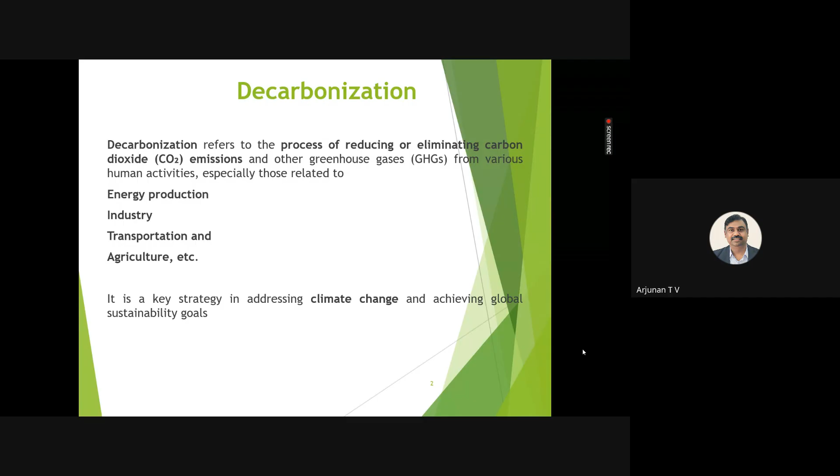decarbonization. It is the key factor in addressing climate change and achieving global sustainability goals, so this word is very important at present. Industry decarbonization has the same definition: it refers to the process of reducing or eliminating carbon dioxide and other greenhouse gases from industrial activities without compromising productivity or economic growth. This is the definition of industry decarbonization.

Normally this involves transitioning industry toward cleaner energy sources, efficient technologies, and sustainable production processes to achieve low carbon and net zero emissions. That is the aim. Particularly, a few industries are the largest contributors of CO2 emissions: steel, cement, chemicals, oil and gas, aluminum, fertilizers, and manufacturing. Industry decarbonization aims to make these sectors environmentally sustainable while maintaining competitiveness.

So is industry decarbonization important? Yes, because the industry sector is a vital source of wealth, prosperity, and social value in the global system. Without industry, we can't survive. Industry produces about 1/4 of global GDP and employment, along with roughly 1/4 of the world's GHG emissions. CO2 is the most significant gas emitted from industrial activities, and almost half of it comes from the production of four commodities: cement, steel, ammonia, and ethylene.

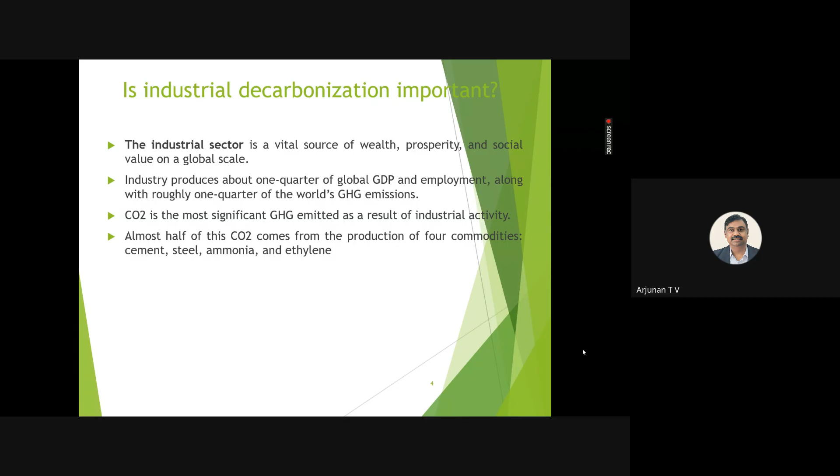So there is one agreement done by the United Nations countries. It was done in Paris in the year 2015. The agreement mainly focuses on keeping the temperature rise below 2 degrees centigrade and ideally limiting the average temperature rise to 1.5 degrees. So this agreement mainly states preventing the average global temperature rise to 2 degrees, and we have to reduce it to 1.5 degrees Celsius.

So all the countries associated as United Nations members have agreed to limit this temperature rise within 1.5 degrees. Achieving these goals would require an 80 to 95% reduction of global emissions by 2050.

Before the industrial era started, in the 1880s, the average temperature rise was very minimal. But after the industrial era started, the average temperature rise has been increasing year by year. Now we are almost reaching 1.5 degrees, and because of this it is threatening the globe.

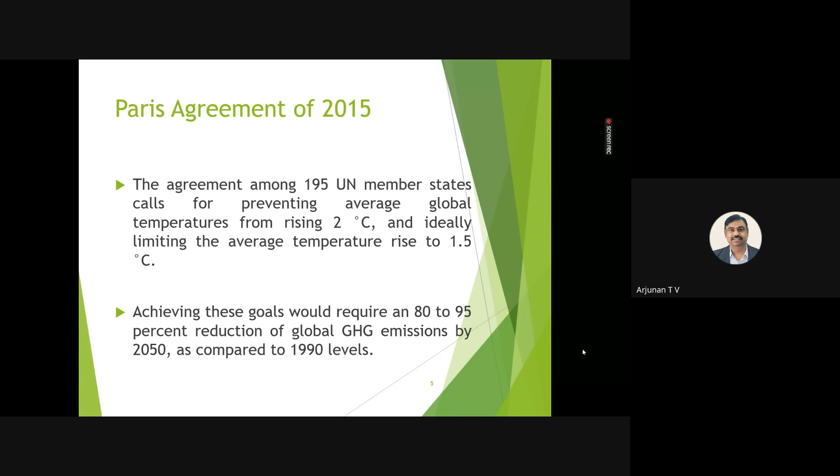So how to achieve industrial decarbonization? There are different ways. First is the transition to renewable energy: we have to replace fossil fuel with clean and renewable energy sources. A number of renewable energy sources are being promoted nowadays. Out of these, solar is the major contributor compared to other renewable energies such as wind, hydro, biomass, and geothermal.

Apart from that, we have to improve energy efficiency and electrification of industrial processes. Wherever we are directly using fossil fuel, we have to convert that into electrification, and adoption of green hydrogen, another important topic people are talking about more nowadays. And carbon capture, utilization and storage is also another important topic. These are the solutions for achieving industrial decarbonization.

So today we are going to discuss only solar. That is the topic given to me. Solar, particularly solar thermal, so we are going to talk about solar thermal only.

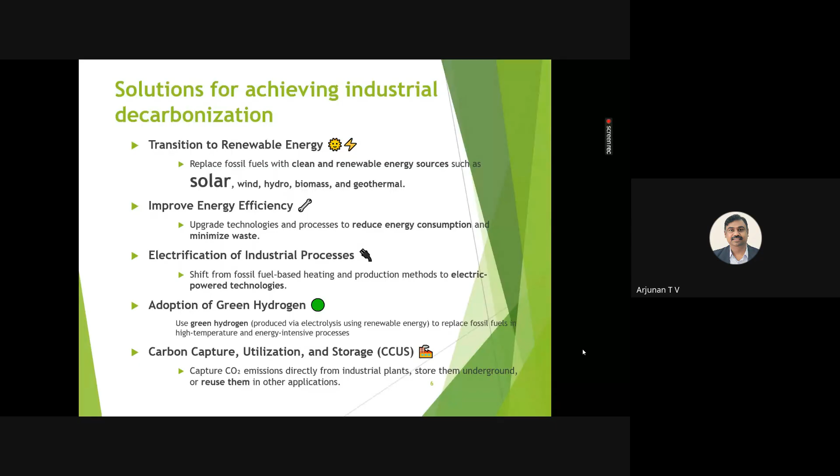Now we are coming to solar energy conversion. Solar energy is converted into two forms of energy: one is electrical energy, another is thermal energy. Everybody knows electrical energy. With the help of a photovoltaic cell, we can directly convert radiation energy into electrical energy and send that energy to the users. Then another kind of energy is called thermal energy.

In thermal energy, the radiation energy is converted. Sorry for that. So this is solar thermal energy. This is the collector, converting radiation energy into thermal energy. This is a sample collector for solar thermal application.

The solar radiation falls on the surface here. This is called an absorber. What will the absorber do? It absorbs the radiation and converts it into heat, so this heat energy is available here. Then some fluid, water or air, passes through this absorber plate to extract the heat, and the heated fluid we can utilize for the purpose. This is the simple basic principle of solar thermal.

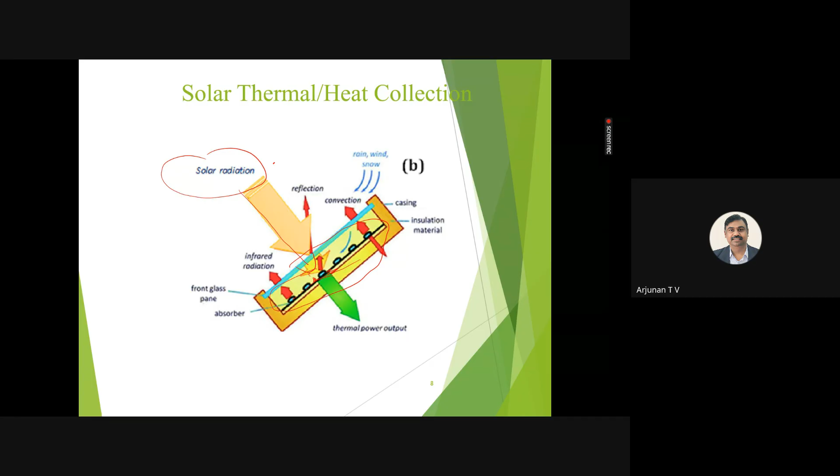So there is a classification of thermal collectors. We have basically non-concentrating and concentrating types. Under the non-concentrating type, you can see flat plate collectors, evacuated tube collectors, and PVT collectors. And under the concentrating type, you find parabolic trough collectors, heliostat field collectors, linear Fresnel collectors, parabolic dish collectors, and concentric parabolic collectors.

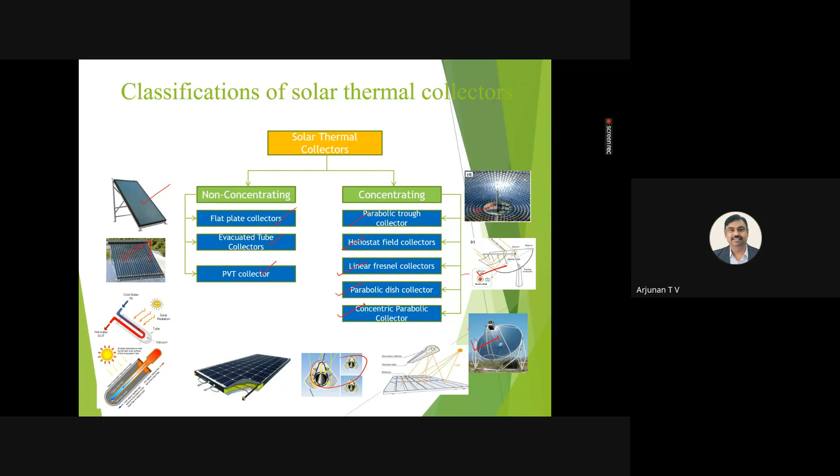So this is the flat plate collector, this is the evacuated tube collector, and you can find this is a tower concept. This is the parabolic trough collector. This is the concentric parabolic collector, and these are the different collectors. This is the evacuated tube model. So we'll see them one by one quickly.

And this is the basic classification of the solar flat plate collector. The flat plate collectors are basically divided into two groups. One is the water heater, another is the air heater. In the water heater, water is the working fluid, whereas in the air heater, air is the working fluid.

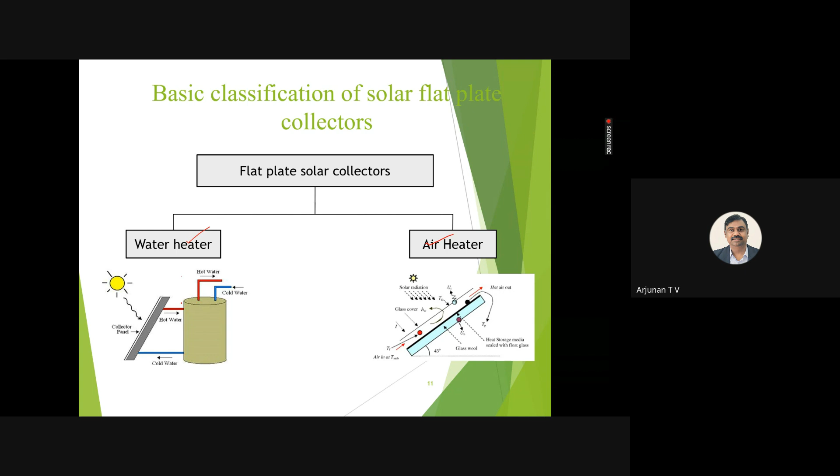So this is the basic components of the flat plate water heater. You can see there is the glass cover, and there is a copper tube where the fluid is passing through, and the bottom surface is the absorber plate, and there is the insulation. The purpose of the insulation is to reduce the heat loss from the system to the surroundings, and the aluminum casing covers the entire system. These are the five important components in the flat plate solar water heater.

So now, see here, when the radiation strikes the flat plate collector, this is a transparent glass. After passing through it, the radiation directly contacts the surface. There, the radiation energy is converted into thermal energy. That energy is transferred to the copper tube where the water is flowing inside. As it travels, the water gets heated and is collected outside. This is the working principle of the flat plate collector.

So here you can see there are two types of solar water heating systems. One is the thermosiphon system, another is the active system. In most houses, you can see this kind of thermosiphon system. Here, the water comes from the main tank to the solar tank, going into the system through the inlet pipe. Initially it is filled with cold water.

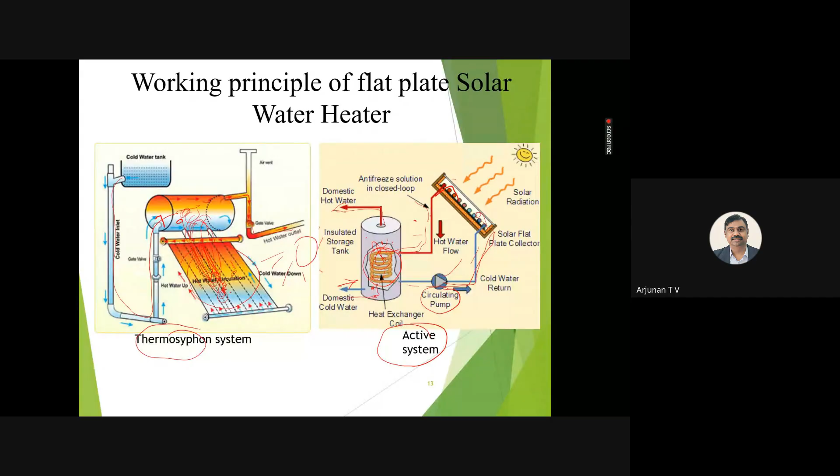Another collector is called the evacuated tube collector. Evacuated tube collectors have the maximum efficiency among concentrating technologies because they require less space. There is a lot of advantage over the flat plate collector, and it can be used in cloudy conditions and cold, windy days. This is the biggest advantage compared to flat plate collectors.

It is a kind of cylindrical tube, as you can see, with an absorber coating. There are inner and outer tubes, and in between there is a vacuum space. The purpose of the vacuum space is to reduce the heat loss between the inner surface and the surroundings, so it acts as an insulator.

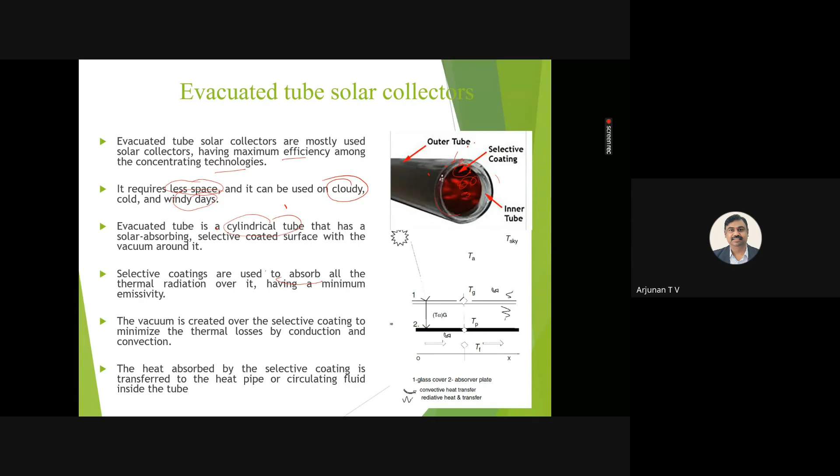There is also a selective coating to absorb all the thermal radiation. This is the inside, where you can find the selective coating, to absorb the maximum radiation available at the site. Once it is heated, this heat is transferred through the working fluid. It may be sent directly to the surface, or with the help of a heat pipe or another medium, we can extract heat from the surfaces.

So you can see this is a view of the ETC tube. This is the view of the ETC tube. Normally it is available in two diameters: one is 58 mm, the other 47 mm. The length of the tube available is 1500 mm and 1800 mm. These are the materials of the tubes.

This gap here is the vacuum. This is called the selective coating surface, and we are getting almost 90.7% of the sunlight onto the surfaces. This is the biggest advantage.

The working principle of the evacuated tube is also very similar to the flat plate collector, but slightly different. You see, this is a water tank, and this is the evacuated tube attached to it. If you have solar water heating in your home, you might have seen this arrangement. This solar tank is connected with the evacuated tube.

So what happens? Once it starts, water is flowing inside the evacuated tube. When the sun rays hit this surface, the surface gets heated because of the selective coating. This radiation is converted into heat, and that heat is transferred to the water, causing it to get heated. Then, by the same principle, since this is hot water and this is cold water initially, this happens due to the density difference.

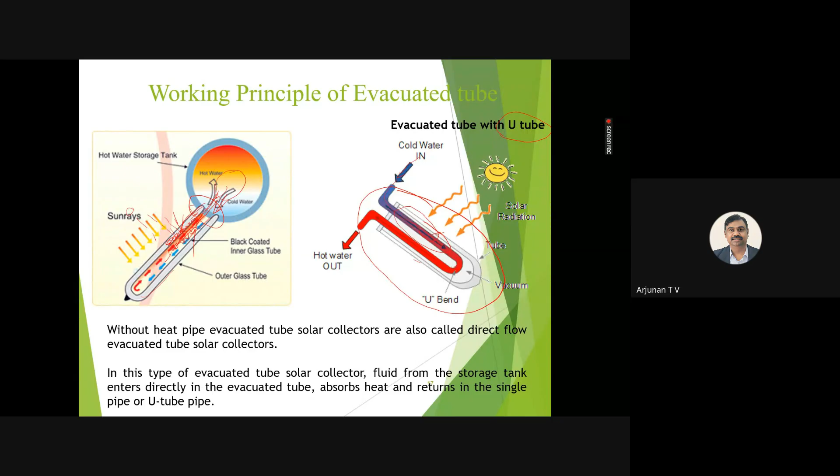So why did this concept come about? In the previous case, all the tubes are connected together. Suppose, due to natural causes, one tube breaks, then the water will leak out. This is a big loss every time this happens. But here, this problem does not occur, because if one tube develops an issue, we can change it easily, with no water losses and no disturbance to the process. This is the advantage over the previous system.

And the similar concept for the evacuated tube, you can see that one.

Here it's called the heat pipe arrangement. This is the ETC tube, inserted with the heat pipe, where one side is the evaporation side and the other is the condenser side. There are two sections: this is the condenser side, this is the evaporation side.

The principle of the heat pipe is there is a working fluid filled in the heat pipe. When the radiation strikes, that radiation is converted to heat. The heat energy available in this surface is transferred to the heat pipe. Once the heat is received, the fluid available in the heat pipe gets evaporated.

Once it is evaporated, it moves in the upper direction. So the evaporated vapor is available with high temperature here. Then we are circulating the water from the outside through this header, where the heated vapor is available.

When the water is contacted with this surface, it transfers the heat to this water, and because of that the water gets heated. Then we are taking the hot water outside, and once it releases the heat, this fluid gets condensed again. Then it comes back to the bottom surface, gets heated again, evaporates, and transfers the heat again. This cycle is repeated.

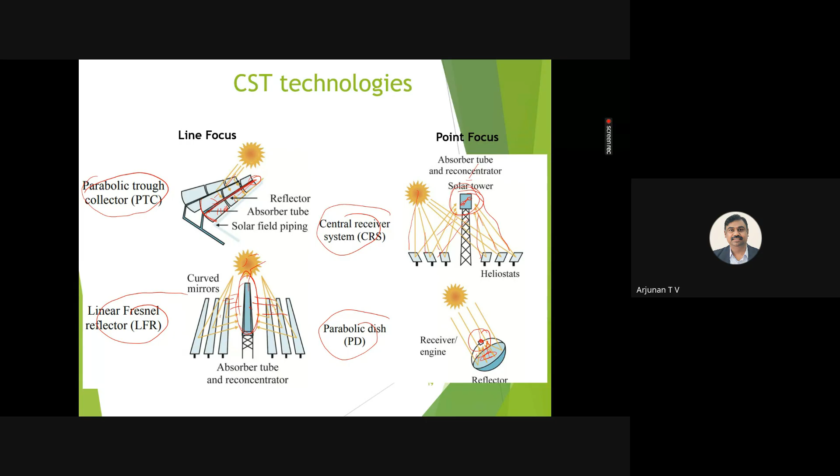So these are the different types of collectors we have seen: flat plate collector, evacuated collectors of different types, parabolic trough, linear Fresnel, parabolic dish, and central receiver collector.

Now let's move to solar industrial process heat, normally called SHIP. So what is this? It's about solar energy potential in industries.

Normally, almost 40 to 50% of total energy is consumed in the industrial sector alone. If you consider the whole, out of 100%, nearly 50% of energy is consumed by the industry sector only. That's why whenever we talk about energy crisis or global warming, mainly we focus on industry, because industry consumes more than 50% of the energy we use nowadays.

And out of that 50%, further, 54% of consumption is in thermal form. Thermal form means directly, not electrical form. So they use heat energy for different applications, with temperatures ranging below 250 degrees.

These applications include drying and finishing in the textile industry; drying, dissolving, thickening, leaching, and distillation in chemical industries; cooking, drying, and canning in the food industry; and kraft pulping, bleaching, and drying in pulp and paper industries. So many applications use heat energy directly without using electrical energy, which is why they use fossil fuels for this purpose.

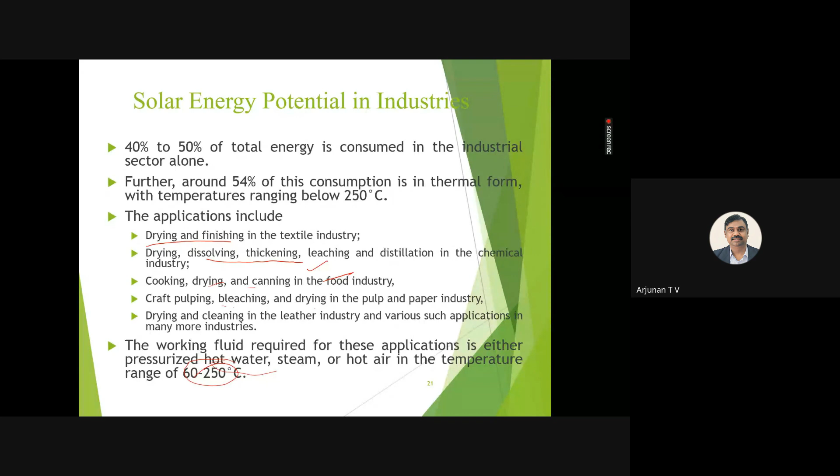The working fluid required for this application is pressurized hot water or steam in the temperature range of 60 to 250 degrees Celsius. So for less than 250 degree temperature, it is easily obtainable from solar thermal technologies.

We can further see different industrial process applications for different industries, and here you see the temperature range. For drying, 30 to 90 degrees is required. For the food and beverage industry, for washing, 60 to 90 degrees is required. You can see many such applications.

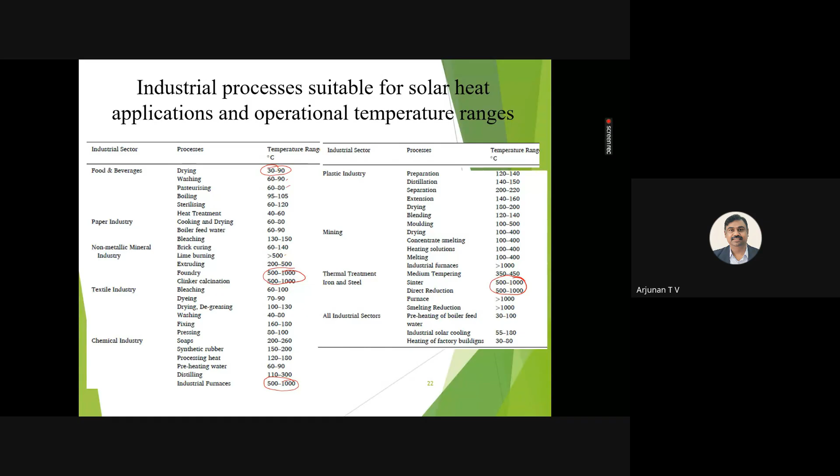Only here you can find 500 to 1000 degree requirements, which are a little difficult to get from solar thermal. But less than 250 degrees is quite possible with the collectors we have seen. So the high temperature side is a little difficult to achieve exactly, but the lower temperature side, less than 250 degrees, has great potential for implementing solar thermal applications in different industries.

This can easily be achieved with the help of flat plate and evacuated tube collectors. Normally with evacuated tube collectors we can get temperatures around 150 to 160 degrees.

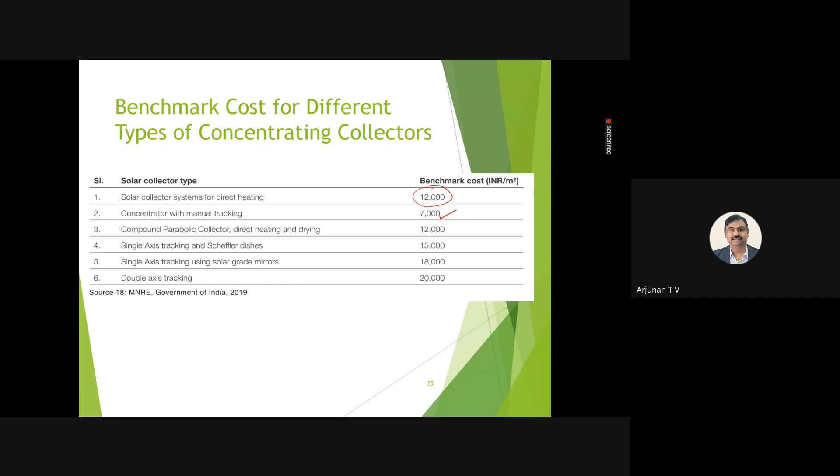And the benchmark cost for different types of concentrating solar collecting systems, you can see, is approved by MNRE. A solar collector system for direct heating application is 12,000 per meter squared. And for concentrator with manual tracking, this is the benchmark. It may vary a little from place to place.

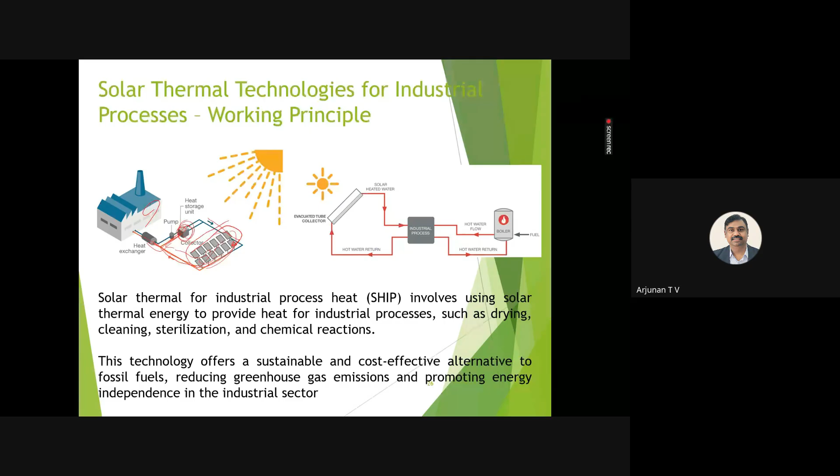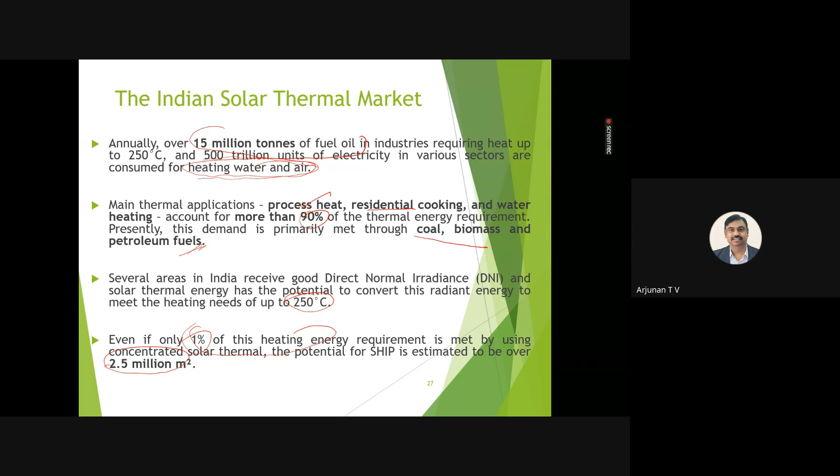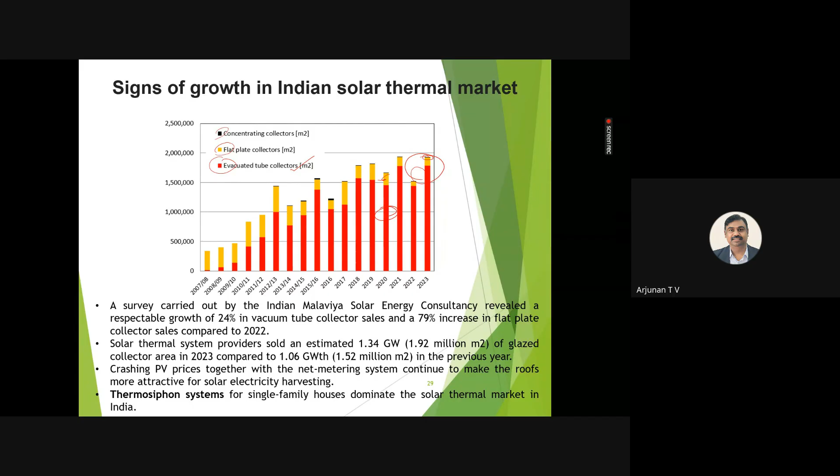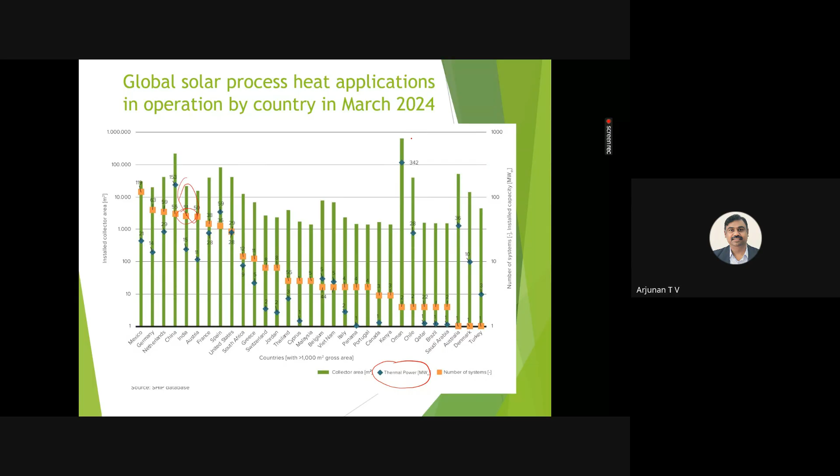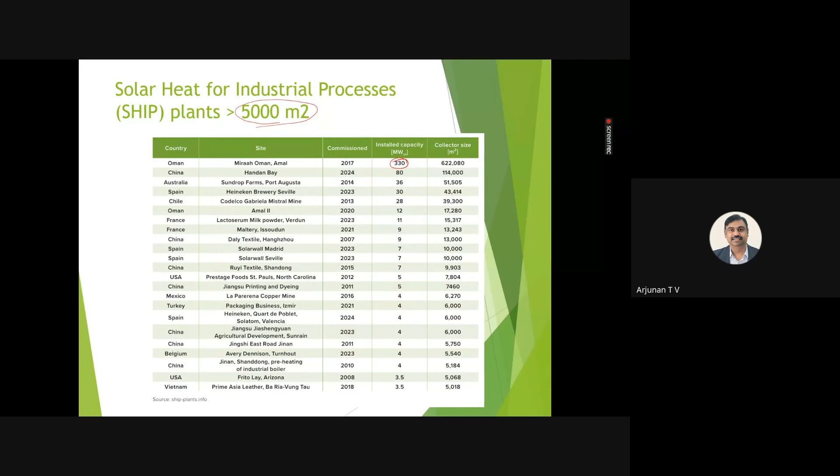And solar heat for industrial processes, plants greater than 5,000 square meters installed, you can see Oman is at the top level, because previously also you could find Oman having a very high number. That's why it's showing here. But we are not in the table because it considers only industrial processes installed with more than 5,000 square meters.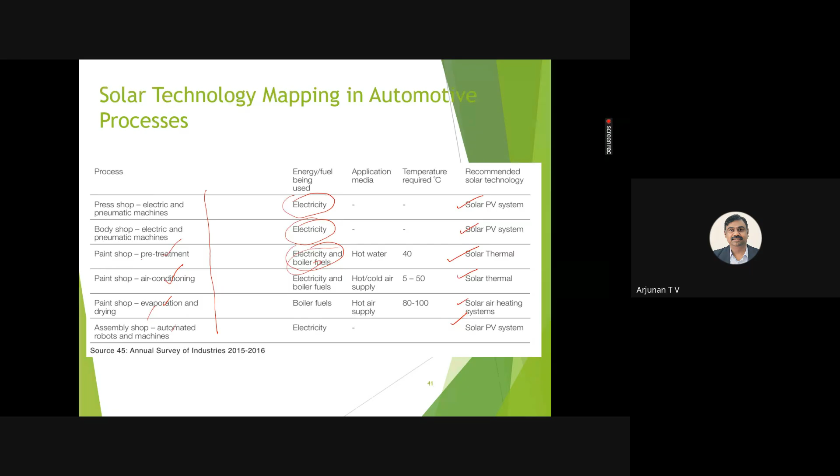electricity, boiler fuels. Wherever electricity is used, that can be replaced with the solar PV system, and wherever heat energy is required, that can be replaced with the solar thermal system. So this is a recommendation for this industry. And for CST, concentrated solar thermal, the potential is also there for dairy industries, around 60%, and food processing industries, and we have huge potential for these industries. So we can use solar thermal technologies for these applications. We can reduce the carbon.

So now we'll move to the general process of SHIP plant design. Suppose we want to design and install a solar heat for industrial process plant, there is some systematic way we have to go. First is the preliminary analysis, to identify the potential application based on basic information about any industry that wants to install. Suppose we want to replace those processes with solar thermal technologies. Then what do we have to do first? We have to go and do the preliminary analysis. We cannot directly buy a panel and install, like in photovoltaics.

Here we have to do some basic initial work before installing the system, to identify the potential application based on the end user, the particular energy consumption, the location. Location is mainly how much solar radiation is available, the heat requirements, and the current energy cost they are paying. And the detailed analysis of heat supply and the heat consuming processes, how they are consuming heat. This would include information on the site condition, available space on the ground, whether we have to install on the ground or on the rooftop. So we have to analyze all those things, and assess the general infrastructure of the industry, including water and electricity networks.

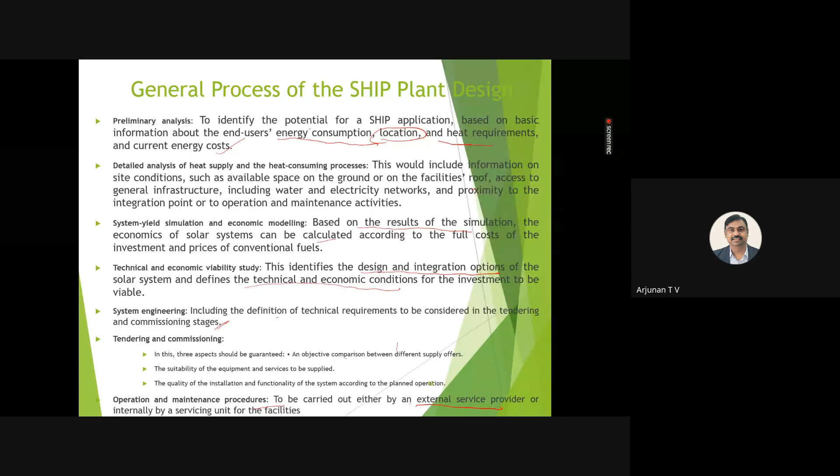And one of the important systems in solar thermal technology is the steam boiler. For industrial processes, we need the steam boiler, the most common heat supply system in industry, supplying different processes directly or indirectly through a heat exchanger with steam. And pressurized hot water for low temperature applications, particularly in the 100 to 120 degree range. Then thermal oil is another important working fluid for temperatures up to 350 degrees, because in some places we cannot use water, so there we have to go with thermal oil.

And hot air burners, then combined heat and power. Heat pumps are another important component; they can upgrade low temperature waste heat to a higher grade. So heat pump technology is also booming at present.

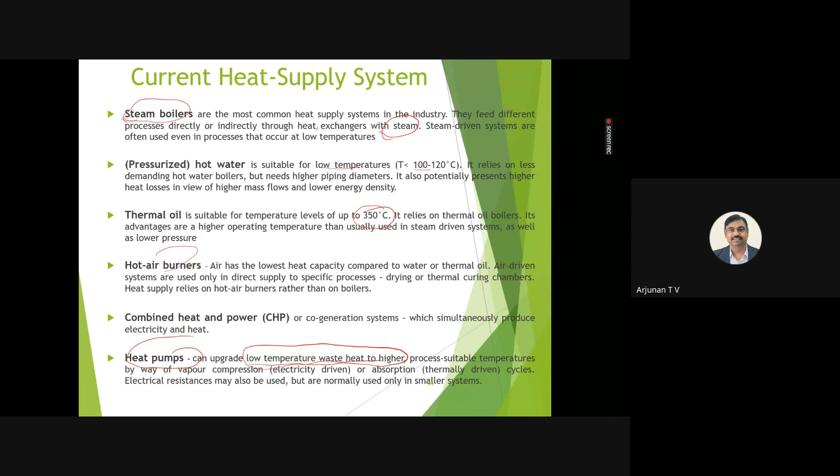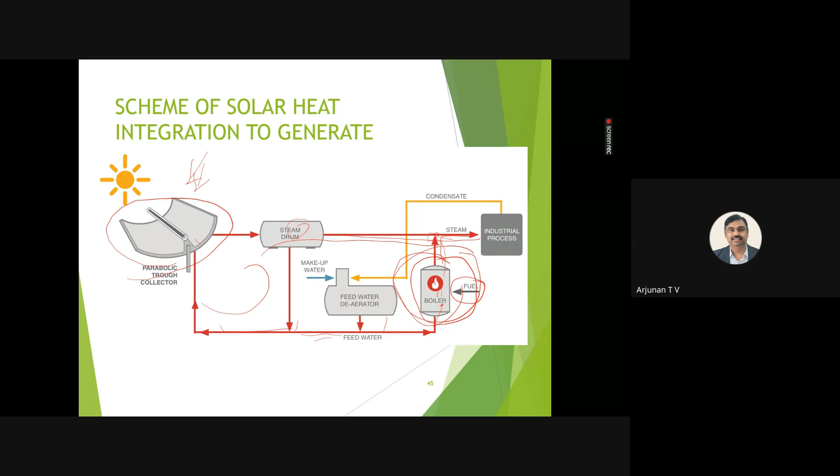When we are getting sufficient sun energy here, we can reduce the usage of fuels; all the energy and steam conversion will be done here, then it is moving here. Whenever we are getting low solar energy, then this will operate, so that our industrial process will not be hampered. This is the integration and the structure in India, how to make this structure.

Normally the beneficiary is called the heat consumer, who is going to consume it. The customer is the one who intends to set up the SHIP project. The supplier is the one who manufactures or completes the system and maintains it under the stipulated warranty. Then the EPC contractor is a registered engineering company that installs the complete system. In most cases, the supplier will be the EPC contractor.

The developer identifies the industry that can use the system. They obtain the system from the supplier and get it commissioned by the EPC contractor, also arrange the finance and prepare the detailed project report. He is called the developer. And the O&M service provider is normally the supplier or EPC contractor who maintains the system.

The dealer is the network of the supplier and developer for different parts of the country. Then the bank or financial institution provides a loan for the project after due diligence, sometimes also with equity participation. And the central or state government agency provides grant in aid, if any, as per the available policy. They will inspect whether it is done as per the norms.

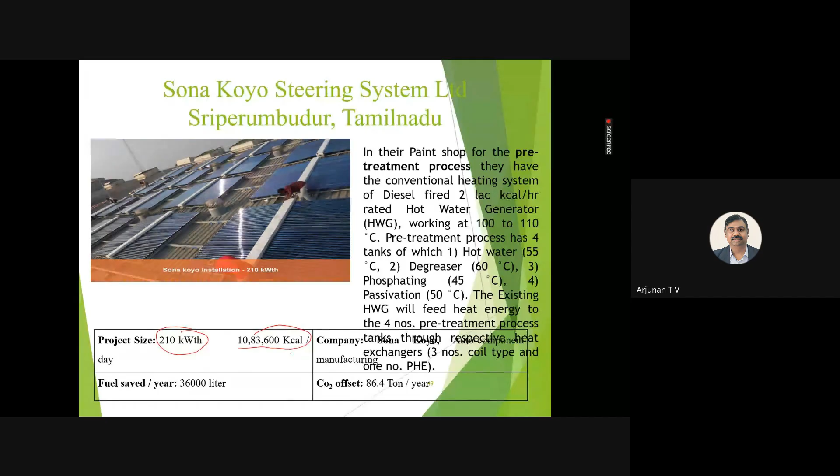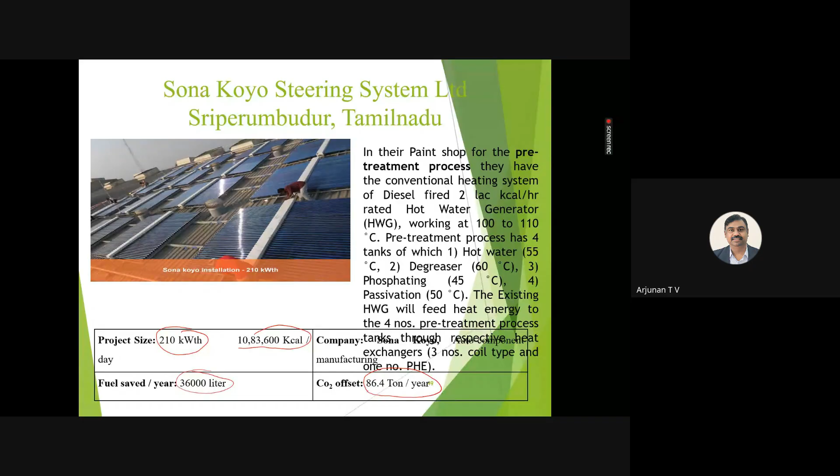In Sona Koyo Steering System Limited, Sriperumbudur, they have installed a solar evacuated tube collector, and the project size is 210 kilowatt thermal. The energy they're saving is 10,83,600 kilocalories per day, and the CO2 offset is 86.4 tons per year. The fuel saved after installing this plant is 36,000 liters per year. And similarly for Wheels India Limited, you can check it.

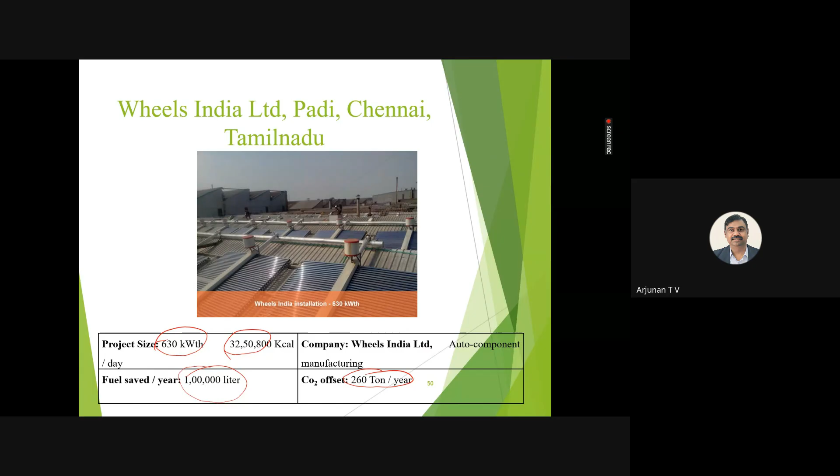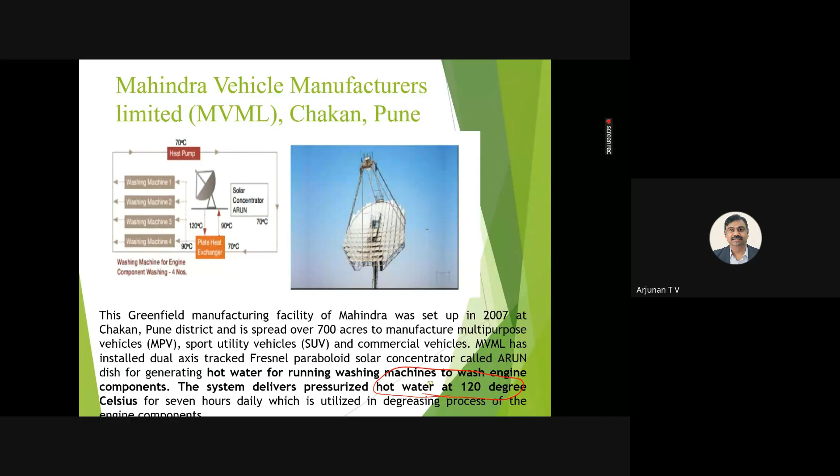They want to heat the hot water to 120 degrees. Similarly, there is a lot of potential in the industries. You can install solar thermal technology to reduce the carbon used for the environment. So this is another industrial application, in Chile.

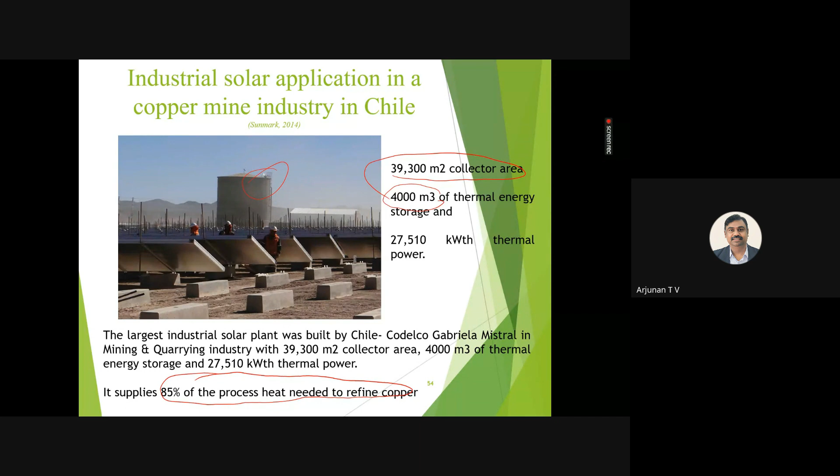So they have installed 39,300 meter square collector area, and with the help of a storage tank, 4,000 meter cube. This is a storage tank also there, wherever the energy gets stored, then they will take it whenever it's required. So it supplies nearly 85% of process heat for the refined copper. So nearly 85% of the process heat is used from this solar technology.

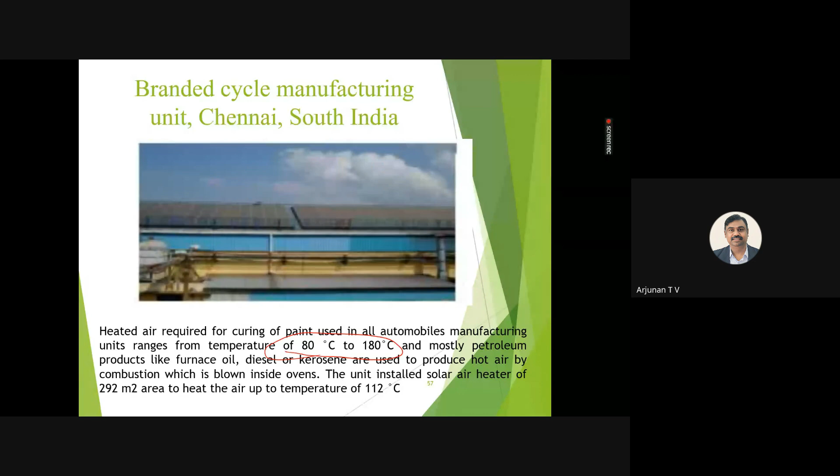So these are proprietary collectors, and these are for another branded cycle manufacturing company in South India. They have installed systems to heat the air from 80 degrees to 180 degree range. And these are some of the industrial air heating systems installed in different locations, from small capacity to the highest capacities.

You can see industrial solar heaters, this is a small system from Issojet Burner Private Limited. For air heating, they are introducing this system, and you can see this air heating technology again in the Maharashtra state.

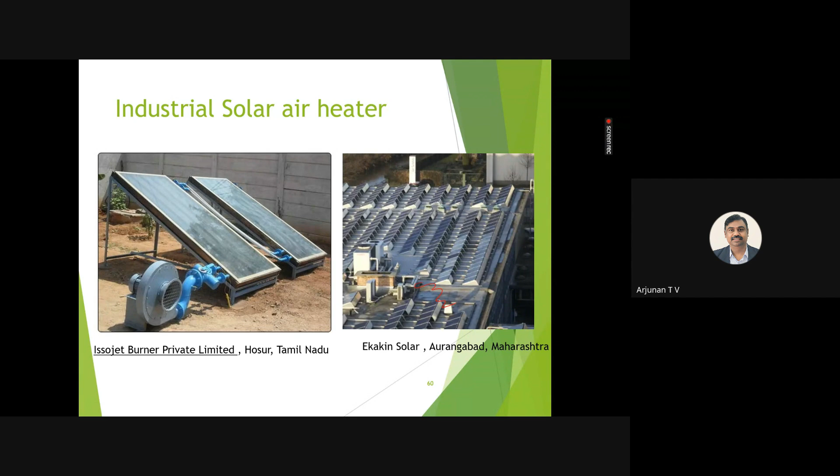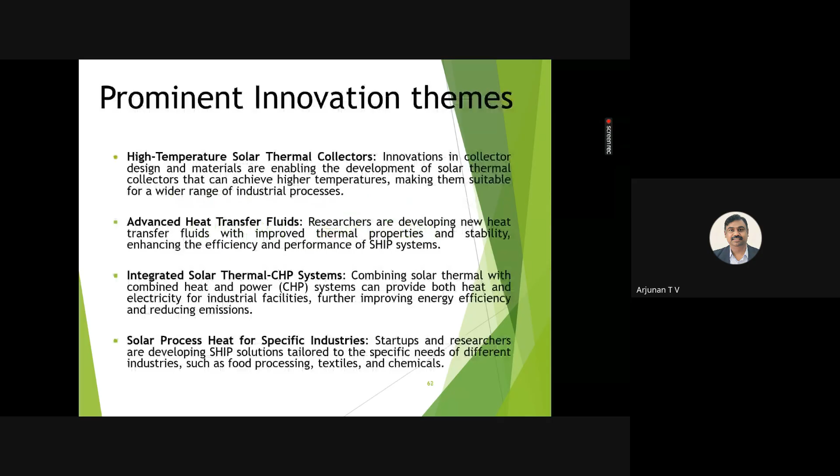And there are some innovation points I am giving, these factors. I'm just moving very fast because these are innovation points that researchers working in this field may use. So how to develop or increase the efficiency or performance of the solar thermal system, based on design factors, this slide moves through the design factors.

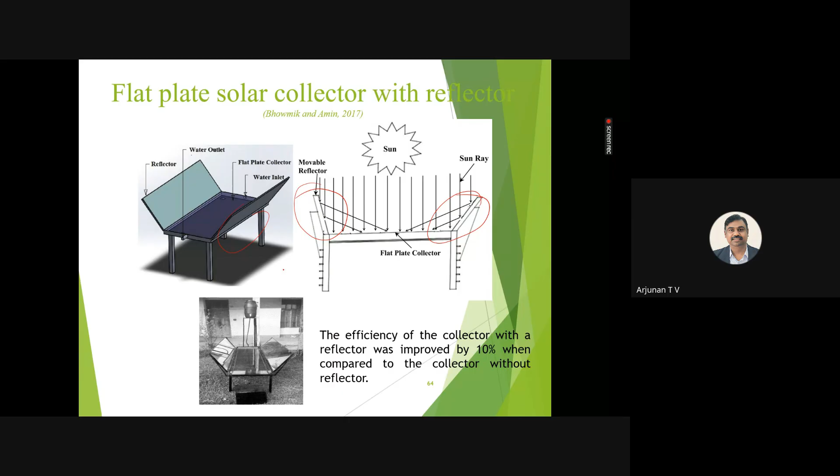And similarly, all the arrangements are with the absorber plate temperatures, absorber design, they are modified to get better performance of the system. And similarly, for the absorber plate, they are making different techniques to absorb more energy, it's called shot peening technique.

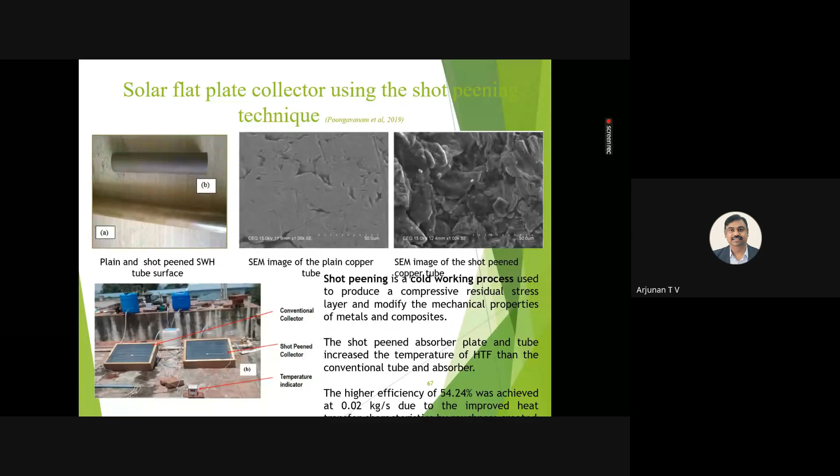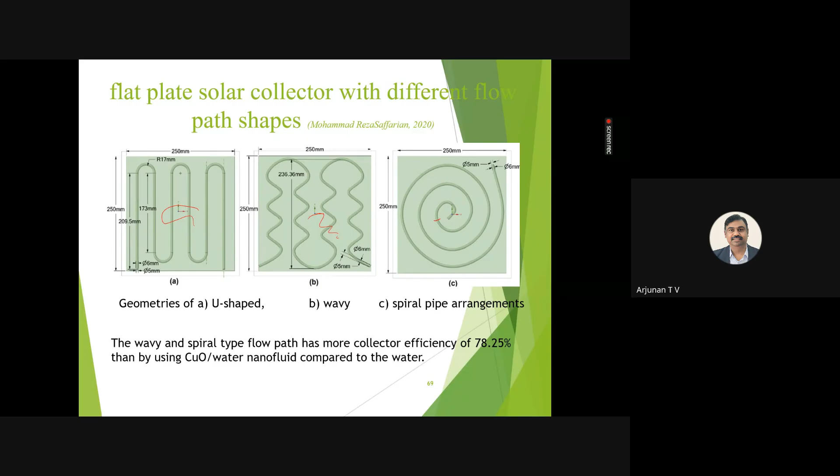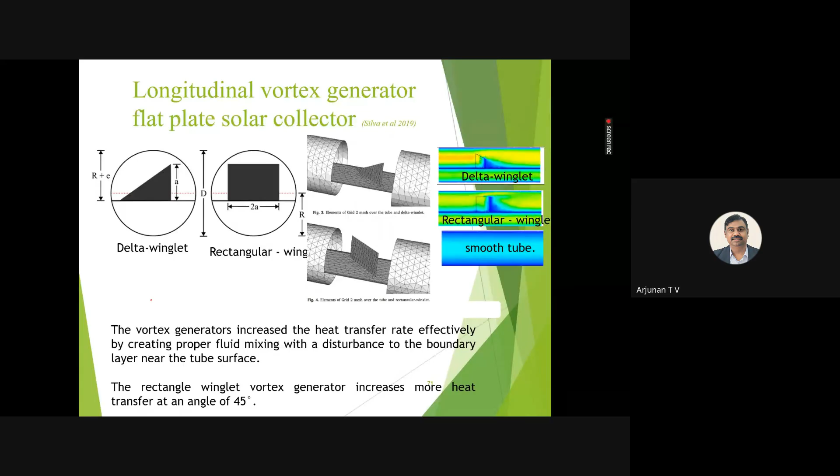And this is another selective absorber used in the flat plate. Some absorbers are selected for improving the absorptivity, and you can see the fluid flow directions, it's like a spiral, a curvy one, and a triple pass. In this way, they improve the performance of the systems. Another concept is creating turbulence while the fluid is flowing, which increases the heat transfer coefficient, and this way we can get more performance.

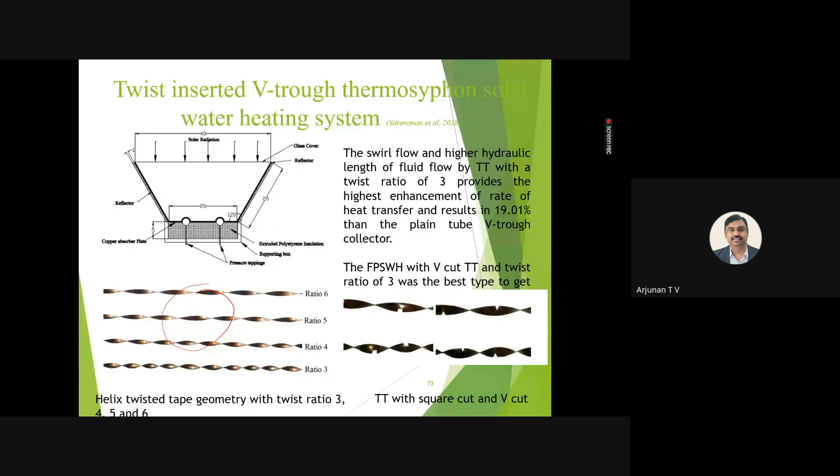And similarly for this interior part, they are fixing the flow side. The fluid is flowing inside, and they're creating some kind of disturbance or velocity enhancer to improve the performance of the system. You can see the twisted inserted tubes here, with twisted inserts through the thermosiphon solar water heating system. This is some innovative idea, installed to get more performance.

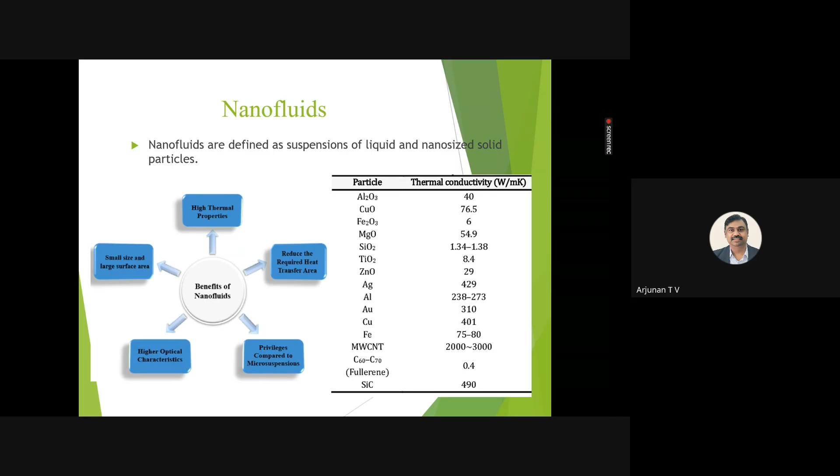Then advanced heat transfer fluids. So the working fluids, how to improve the performance with the help of working fluids. Normally it's called nanofluids, where they introduce nanoparticles and mix them with the fluid. Because of that, they're getting better performance compared to others.

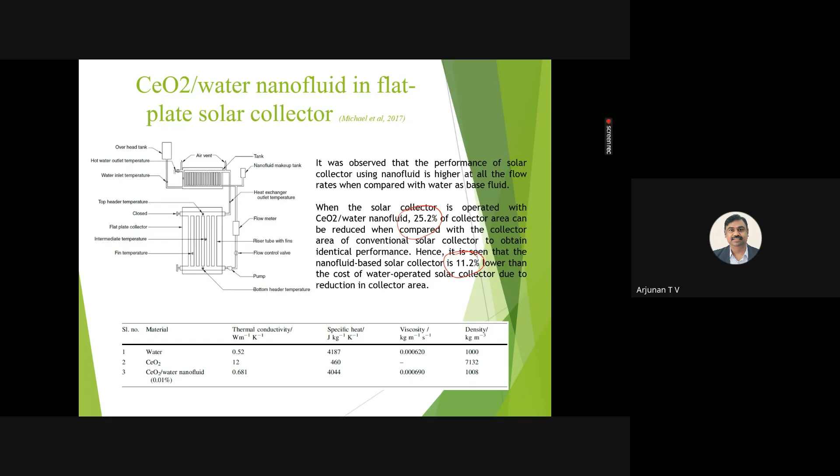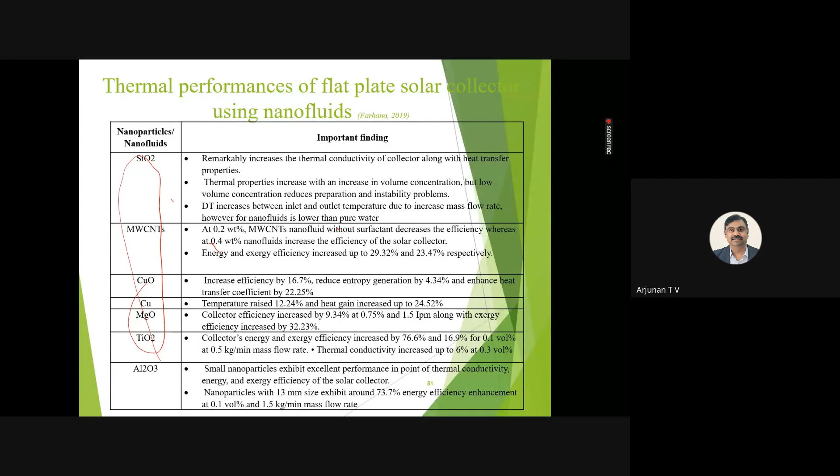And these are the working fluids he has done with aluminum oxide, cerium oxide, as you can see in this figure. Then you can find the performance improvement with the help of the nanofluids. These are the different nanoparticles, and if you mix them with the base fluids, we are getting better performance.

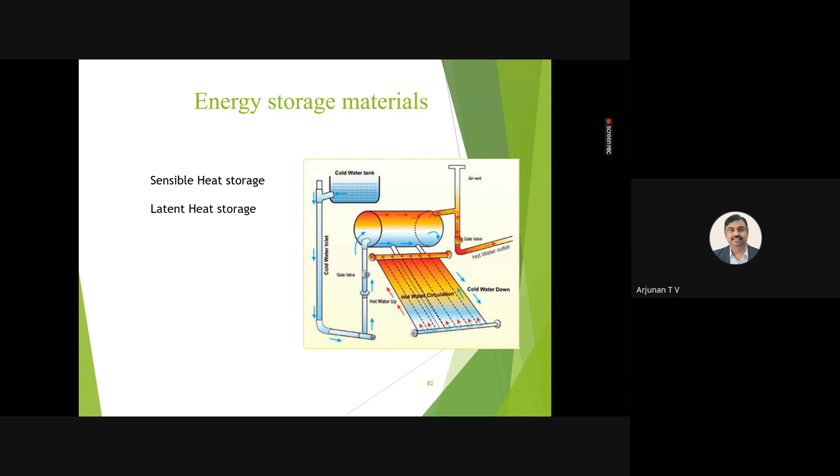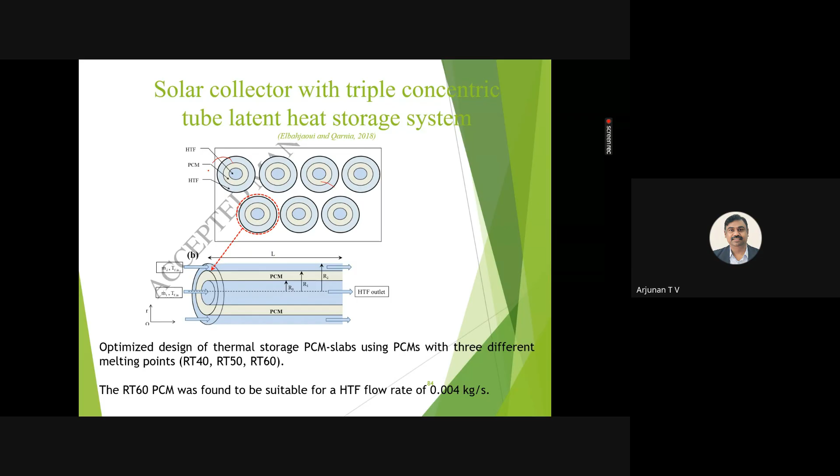Apart from that, energy storage material also influences the performance of the system. There are two types of energy storage: sensible and latent heat energy storage. These show how to fix these. You can see the PCM container here, and similarly, the PCM material they have installed here. This surface is PCM, showing how to explain the storage material.

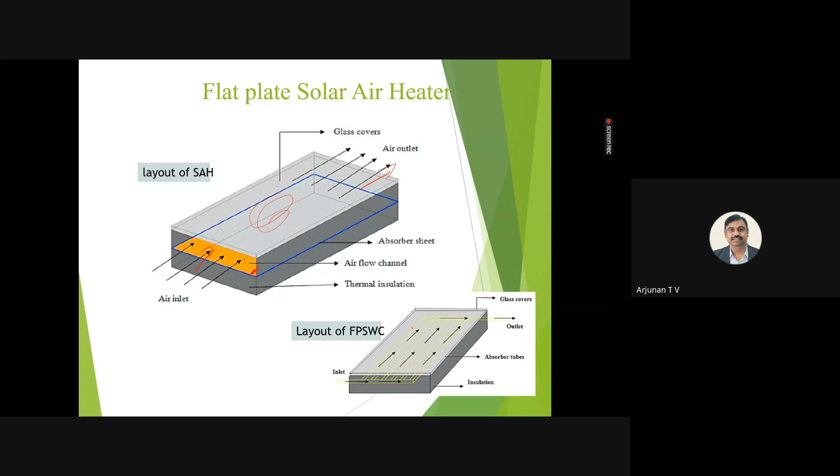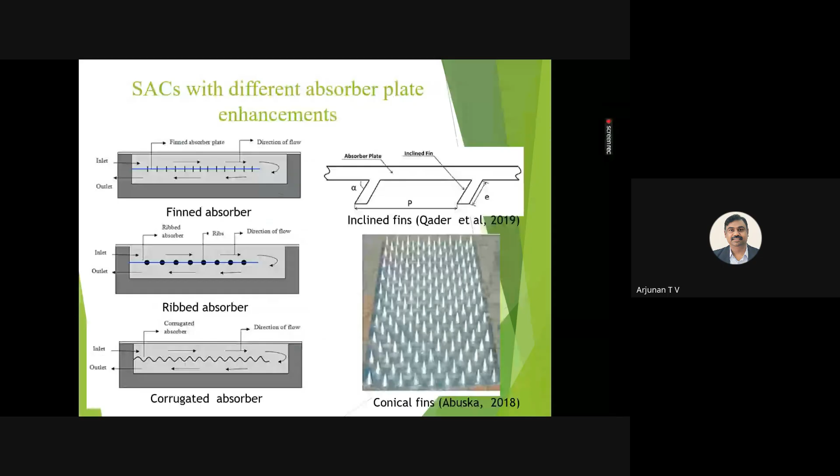Now come to the air heating side. This is a simple air heater. When you pass the air through this, as it goes out, the air inside is absorbing the heat, and because of that it gets heated. Similarly for this, we have a lot of modification in the design aspect, like a double pass, and a lot of modification we can do to improve the performance of the air heating system.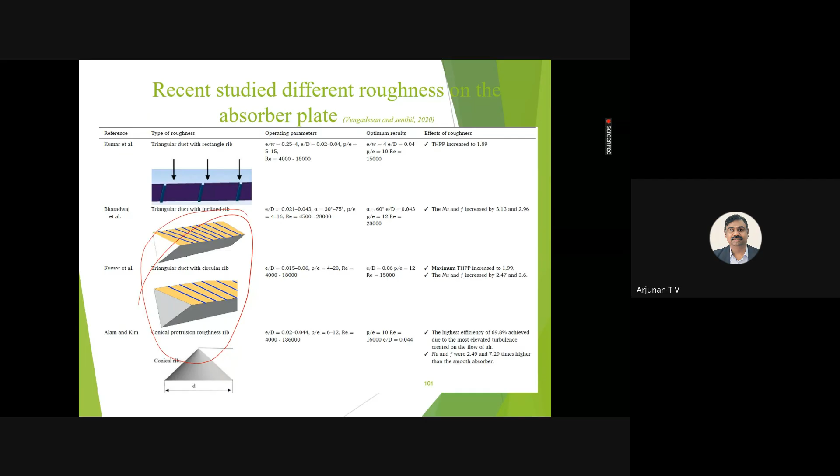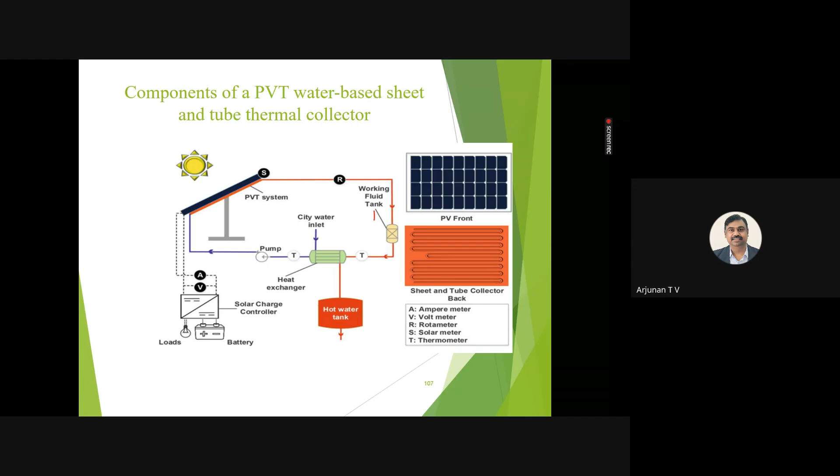Then one more thing is the photovoltaic thermal collectors. It's a combination of the solar thermal collector, which we studied, and the photovoltaic. This combination of heat and electrical is called a photovoltaic thermal system, which is available nowadays and trending. More people are working on this, producing a combination of either air heating or water heating with electricity. This is called a solar PVT collector.

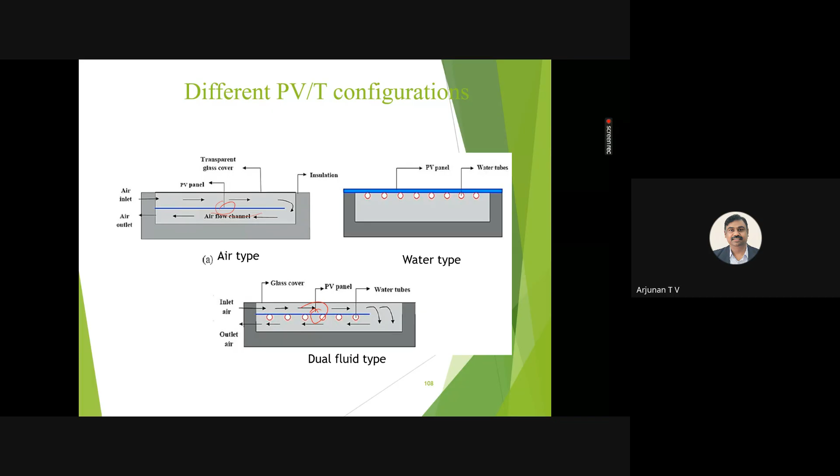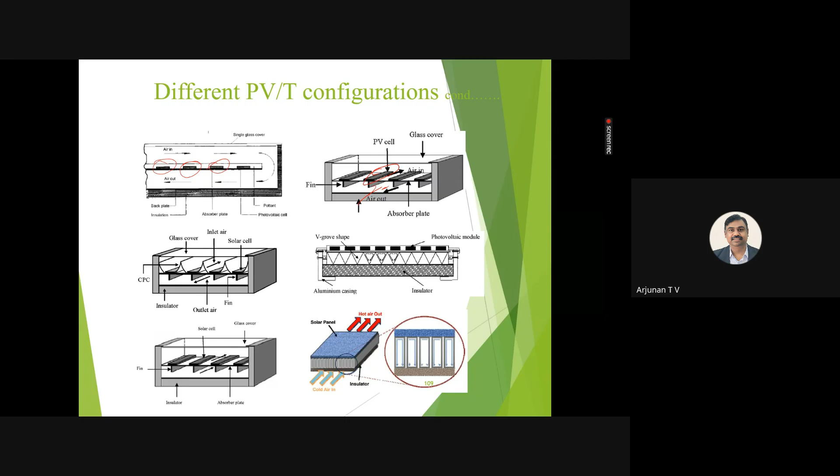These show the PV panel is located here, and this is the solar PV panel, which produces electric energy as well as heat energy. That's why it's called PVT. In this figure you can see the CPC arrangement, and this is the PV cell. So this device does air heating as well as electricity generation.

So this is the way, with enhancement etc. It's a similar thing, only this is a different flat plate collector.

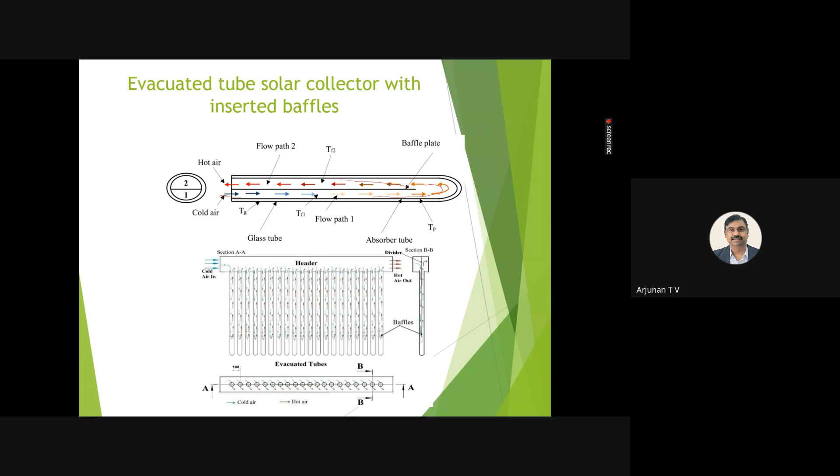This baffle attachment is done by our team only. When the water air is flowing this direction, it is gaining heat as it goes. This is the way we have achieved more than 100 degrees of air for industrial applications. This is another method to improve the performance of the existing system.

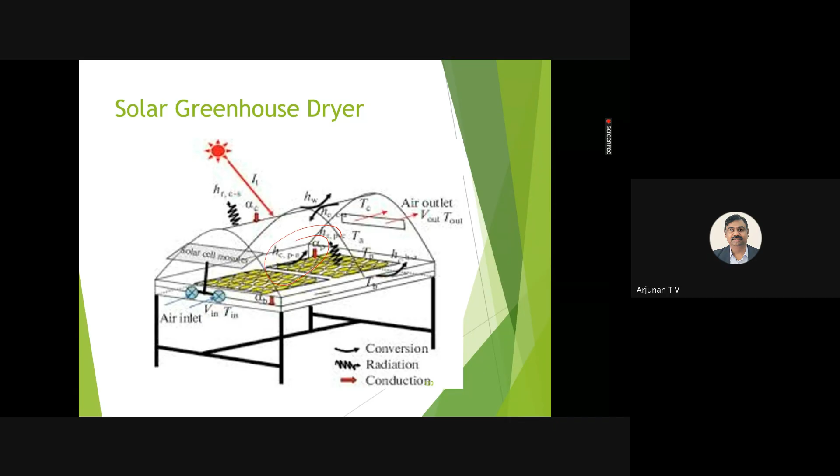Another drying system is the greenhouse dryer. Maybe yesterday, on the first day, Madheswaran taught about this greenhouse dryer. He is an industrialist person. So this is the greenhouse dryer for different applications.

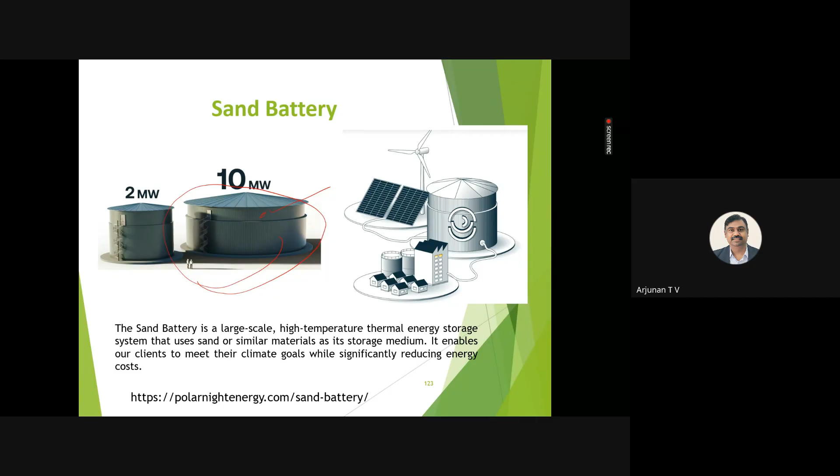This is a new technology coming up, called the sand battery system. With the help of sand, they are storing the excess heat energy during the daytime, and whenever required, we can take it from there for application. This process has now started in foreign countries, and this is photovoltaic again generated.

Nowadays it has started here, the PV2Heat. The word PV2Heat is nothing but, normally in the photovoltaic system, we need an inverter to convert DC into AC. But this system now works with a direct PV connection, coupled DC from the rooftop PV panels, directly able to heat the water.

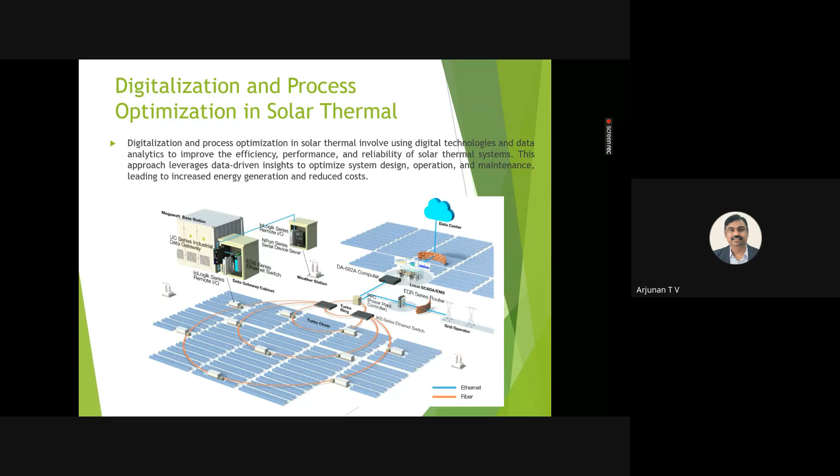There are different innovations in the solar thermal need, because solar thermal is now starting. So we need a lot of digitalization and process optimization. Even in the hybrid solar thermal system, a lot of innovations are required.

This is the integrated solar thermal system for buildings. This system covers completely solar water heating, air heating, even space heating, everything available in a single system. That's called the integrated solar thermal system for building applications.

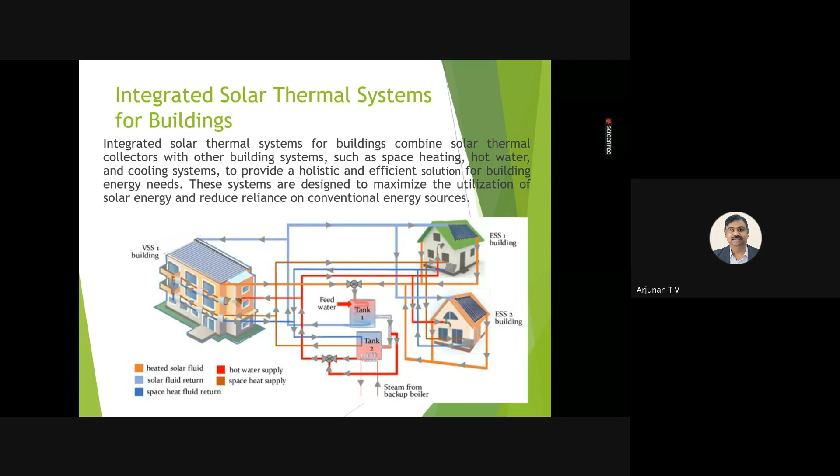Such kinds of things are available, and we have already seen this. This is also a combination of solar thermal with biomass gasification.

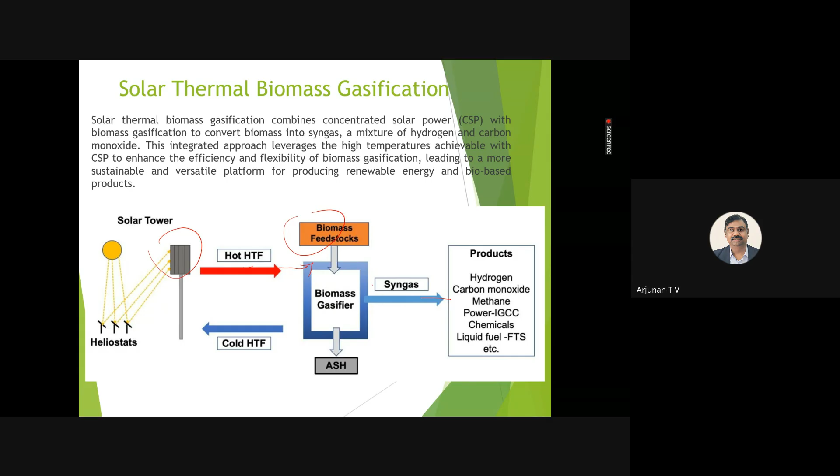Here it is a combination of solar tower and biomass system. We can use the hot fluid from the solar tower for the biomass gasifier to produce gas, and that gas can be used here. This is one concept, and the same concept applies to biomass for different applications.

Another area is the solar thermal collector with selective coatings. Different coatings are used to absorb more energy, so people are still working in this area.

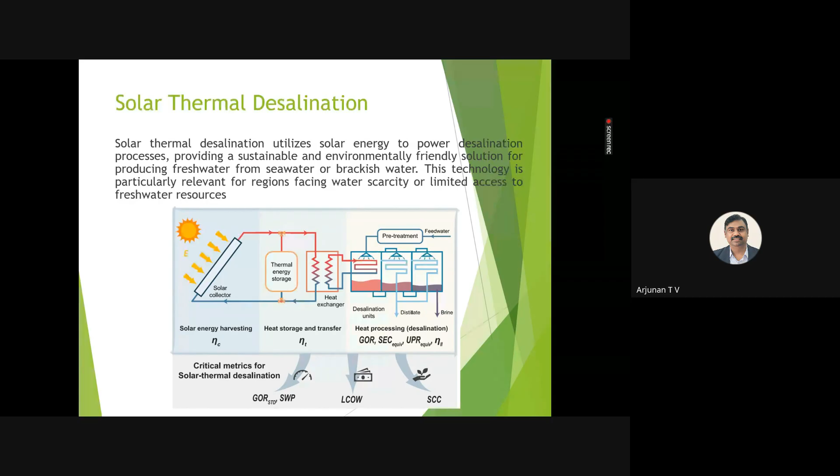Solar thermal desalination also has huge potential for thermal energy conversion. Nowadays, thermal desalination uses fossil fuel for the heating application purpose, but that can be replaced with solar thermal for the desalination purpose. This figure shows that only.

And heat pump technology, as I already told you, is now coming up. People are actively working on it.

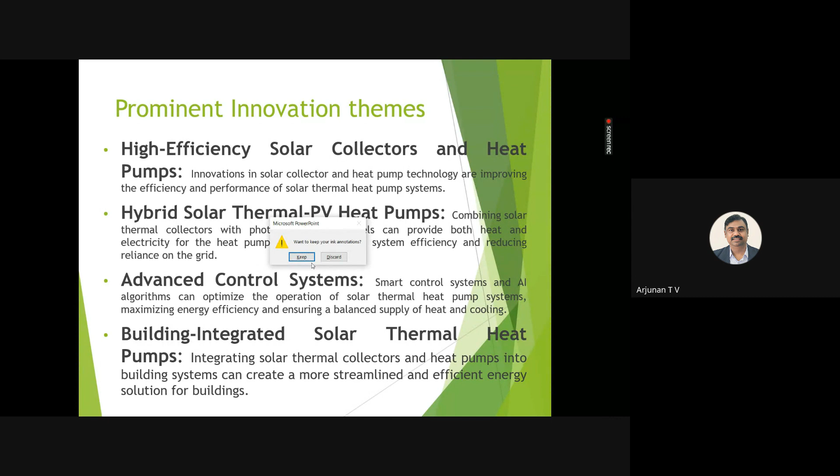Hello. Yes sir, please sir. Michael, yeah, so I have completed my presentation. I hope I have only taken 5 minutes extra. As per the schedule. No issues, sir, no issues.

Do you have any queries, or I am ready to answer? Any queries from the audience side? There is one question from our participants, sir.

The question is: does the generated heat by solar contribute to increasing the global rise in temperature? Whether it will raise the global temperature rise, that's the question, sir.

No, it will not, because the global temperature rise is mainly based on the production of CO2 emissions. Here, solar energy has no point of CO2 emission. CO2 emission happens only from fossil fuel waste. When you burn fossil fuel, the byproduct is greenhouse gas emissions. But in solar heat, there are no such emission possibilities. That's why we are replacing fossil fuel with this solar energy.